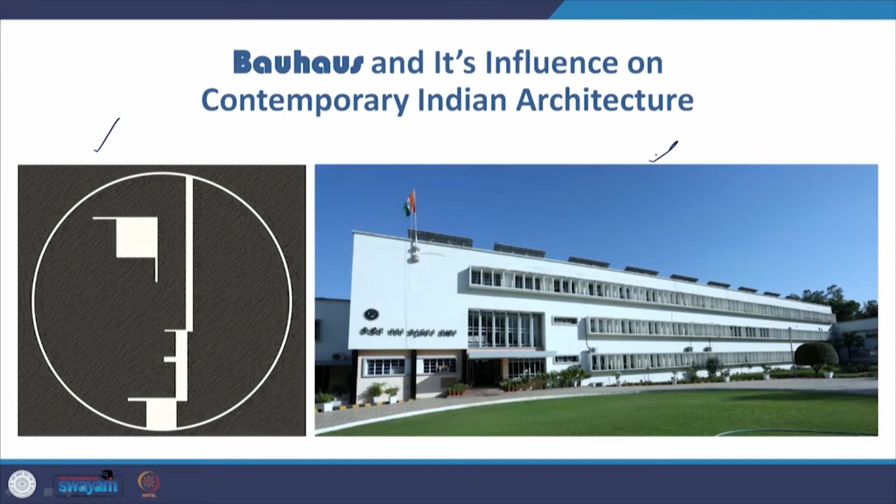Hello students, we will continue our presentation on the work or the impact of Western architects in India, and we are looking at the contribution of Walter Gropius. This is part 2: Bauhaus and its influence on contemporary Indian architecture. This is the logo of Bauhaus, and this is the Central Building Research Institute, CBRI, IIT Roorkee, designed by A.P. Kanvinde.

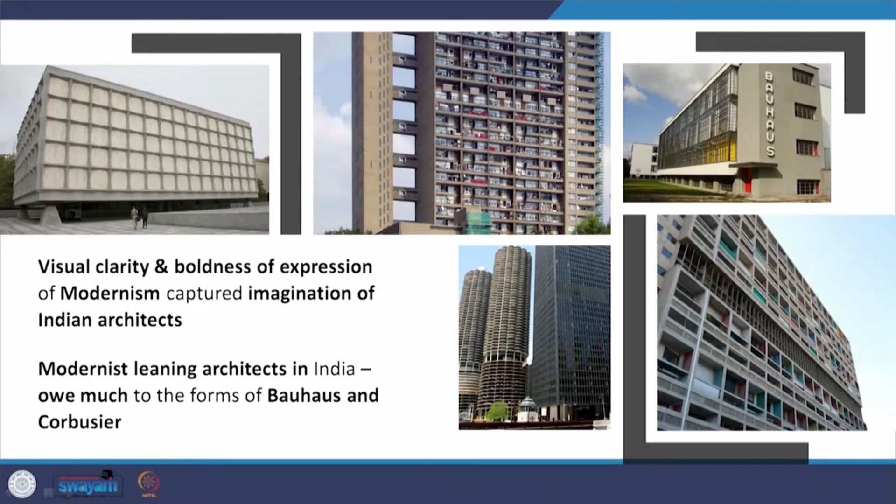Now the contribution of Bauhaus has been in two parts: architecture and education. The education you are receiving as students of architecture is predominantly based on the Bauhaus model. The visual clarity and boldness of expression of modernism captured the imagination of Indian architects. In the last presentation on Walter Gropius, I talked about the design of the Bauhaus school by Walter Gropius and the curricular structure of the Bauhaus school, which then got global presence.

But like I mentioned last time, we cannot look at the design of Bauhaus as an isolated example of modernism. There is a range of architects and their buildings that form the composite picture of modernism: Corbusier, Mies van der Rohe, Walter Gropius, the De Stijl architects like Rietveld, and Adolf Loos, and then later many architects like Richard Neutra, Marcel Breuer, Alvar Aalto, Eero Saarinen, and many others, continuing onwards into late modernism and so on. So the picture that emerges is not one architect but several architects contributing.

This presentation focuses on the contribution of Walter Gropius and Bauhaus. The modernist leaning architects in India owe much to the forms of Bauhaus and Corbusier, primarily because Corbusier came to work in India, when he designed Chandigarh and several projects in Ahmedabad, while Walter Gropius made his presence felt through the works of two prominent architects, Habib Rahman and A.P. Kanvinde, the first generation of modernist architects in India.

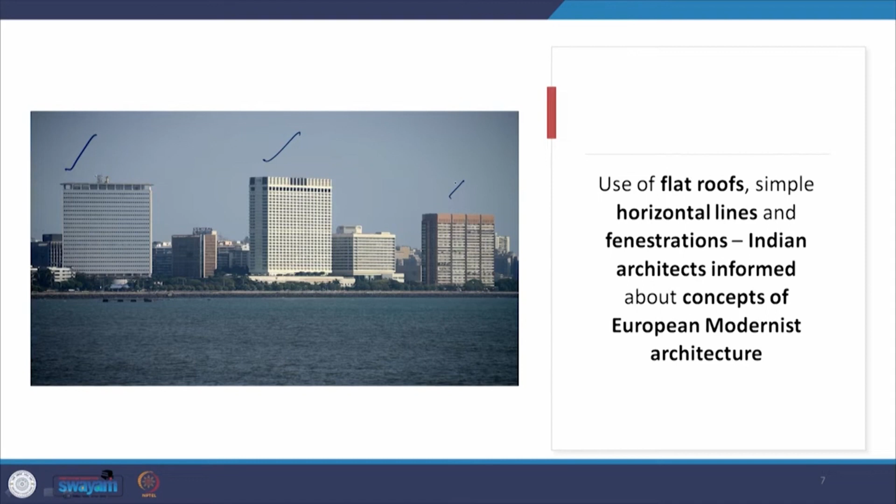For example, these buildings: this is the Air India building in Mumbai, the earlier Air India building. This is the Trident Hotel of the Oberoi chain, and I believe this is a residential building. So these buildings along the Marine Drive, where we see the use of flat roofs and simple horizontal lines and fenestrations, show clearly that Indian architects were informed about the concepts evolving in European modernist architecture.

Of course, these buildings were adapted for Indian situations, and as I have said earlier, climate is one of the defining factors of the way our buildings look. Modernist buildings in India were being built parallel to modernist buildings in Europe and America, particularly skyscrapers in America. For example, when I am talking of point blocks, they were sleek glass skyscrapers there. The same architects who were working there, for example, in the buildings they designed in India, would adapt them to our climatic conditions.

Gropius's link with India was through AP Kanvinde and Habib Rahman, and that was because Habib Rahman studied under Gropius at MIT, while Kanvinde studied under him at Harvard. How can one man be in two places?

Gropius was teaching at Harvard and also taking lectures at MIT, so both of them got an opportunity to study under him. They brought Bauhaus into India, and in fact surpassed Corbusier in bringing modernism into mainstream Indian architecture of the period, with which their projects are related.

Looking back at the middle class works of Architects United in Pune, for example, those works are connected with modernism in general, and in some ways also with Corbusier, because it is difficult to differentiate where one modernist architect's contribution ends and another begins. But there is a very strong impact of the functional organization of Bauhaus and Walter Gropius, so mainstream Indian architecture probably owes more to Gropius than to Corbusier. But it is very difficult to define these fine lines. Their works changed the course of India's architectural pattern of that time.

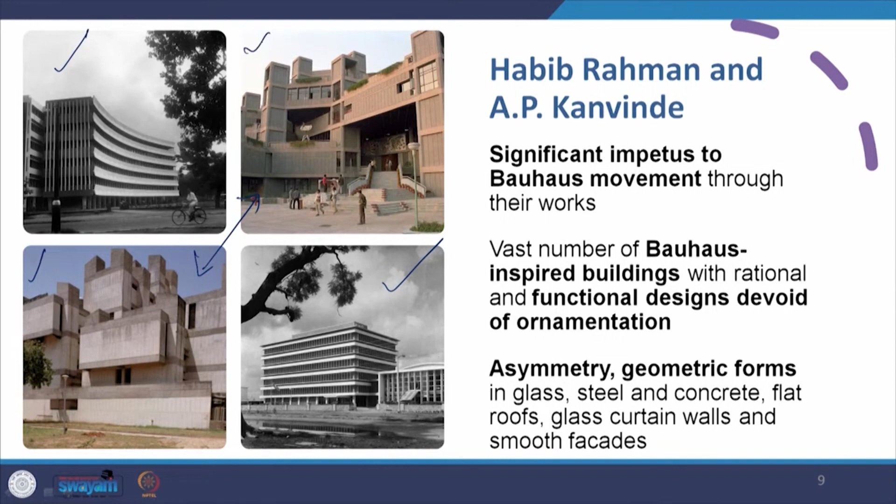This is the Dak Tar Bhavan by Habib Rahman, and the amazing contribution he makes in bringing this kind of modernist building to India is seen in sharper relief when we realize he was working within the structured mechanism of CPWD.

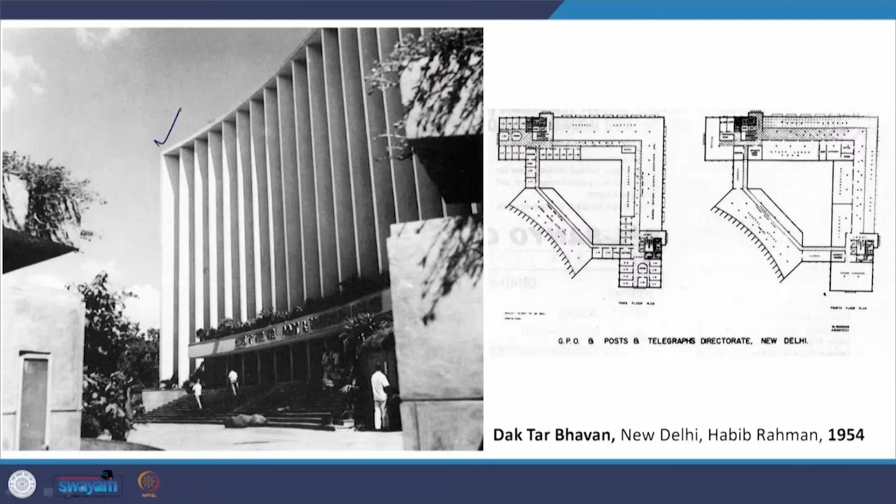He was heading the CPWD, never moving out of it, and while working for them he designed these amazingly iconic buildings. The Dak Tar Bhavan is very strongly connected with modernism, with fantastic louvers or sunbreakers, which is the impact of Indian climatic conditions.

Then we have a series of buildings in the 60s: the Indraprastha Bhavan in Delhi in 1965, multi-storied apartments in R.K. Puram in 1965, the Curzon Road Hostel near Connaught Place in 1967, and the WHO building in 1963. These are the 60s contributions of Habib Rahman.

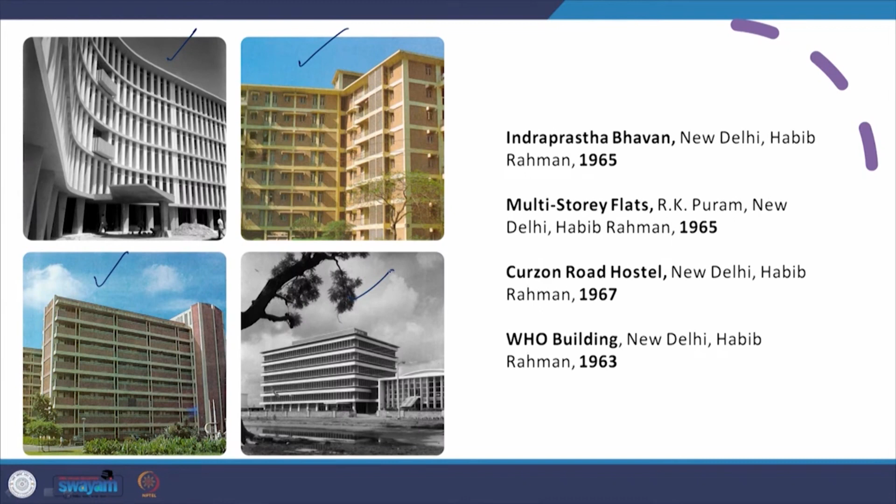Having stepped off the boat from America, he designs these buildings so strongly connected with Bauhaus and Walter Gropius. Then we have the contributions of Kanvinde, which are probably somewhat earlier. The reason these buildings appear in the 60s in Delhi is because before this,

Habib Rahman was working with the Calcutta Public Works Department, where he designed a very important building that set off his journey, the Secretariat building. We will look at that.

Kanvinde began as the consulting architect with the CSIR, designing the CSIR labs: the National Botanical Research Institute in Lucknow in 1953-54, the Toxicology Research Center again in Lucknow in 1969-70, the CBRI in Roorkee in 1951, and the Physical Research Laboratory in Ahmedabad in 1953-54.

Bauhaus was integrated as time went on with India's cultural and climatic factors. Things could never move forward in India purely as modernism. What I mean is that these buildings did come in as purely modernist works in the hands of Rahman and Kanvinde, but the language of culture and climate of India was added on to it.

This happened in the works of Habib Rahman to a very large extent. In contrast, it did not happen in the works of AP Kanvinde, who stands out as one architect whose buildings had very limited connection with any traditional Indian elements, in fact to a large degree none at all.

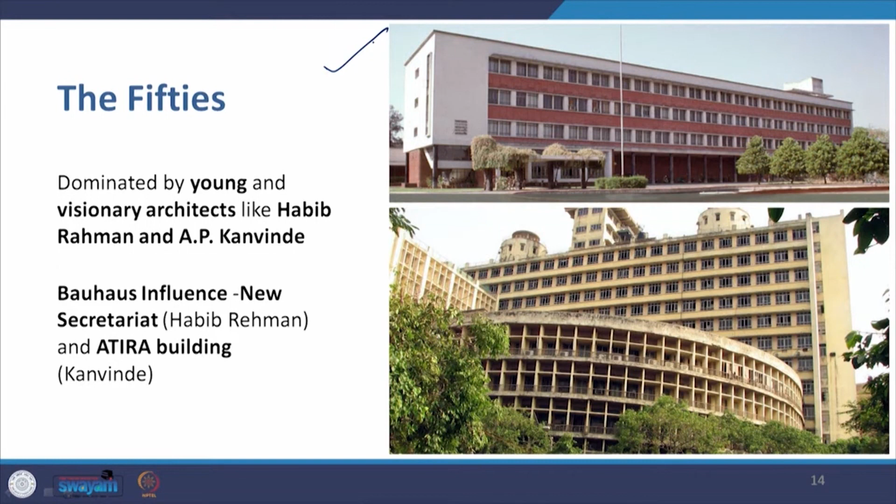Now in the 50s, they were dominated by these two visionary architects, Habib Rahman and Kanvinde, and the Bauhaus influence, for example, is seen in the Atira building, the Ahmedabad Textile Industries Research Association building designed by Kanvinde, and the Secretariat building designed by Rahman in Kolkata.

The new Secretariat building in Kolkata by Habib Rahman, 1949 to 54, shows the significant new way of thinking in rationalism. Rahman, having returned to India, said that he was full of Gropius, Oscar Niemeyer and Brazil. He said that in 1988, and in this 15-story modernist building he designed, there is a great clarity of form coming from Bauhaus, combination of geometric forms with vertical and horizontal lines.

You can see the vertical mass, accentuated by these vertical lines of the louvers on this side. This is the facade where you see these vertical louvers, and this verticality is accentuated by a series of vertical lines here. Then you have this part of the building where you have these deep louvers or sunbreakers or brise soleil like that of Corbusier. So this part of the work refers back to Corbusier.

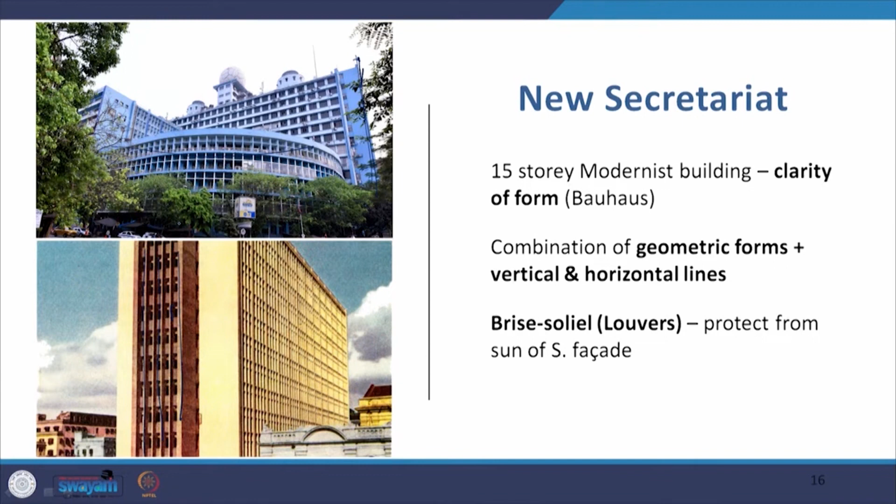Now these brise soleil protect from the sun of the south facade. So therefore the Indian climate, the presence of the Indian climate is felt immediately as soon as they start designing these buildings in India.

Now the UGC building in Delhi, the University Grants Commission building in 1954, the building on the right that you see here is the Comptroller and Auditor General building designed in 1958. So this set of two amazing buildings in the modernist Bauhaus category.

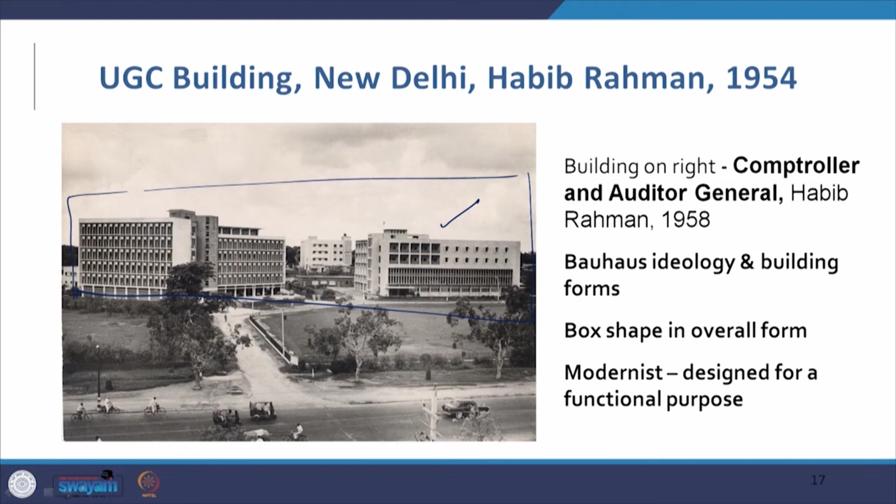So the Bauhaus ideology and building form is a box shape in the overall form, and it is designed in a functionalist manner.

Now with regard to the site function and climatic response, the entire building, the UGC building, is divided up into two wings to fit into the site, and it has covered parking.

The parking is provided by raising the building on pilotis, and the functional part that we see here is the service core, which is at the junction of these two wings of the UGC building.

Then there are the sunshades and louvers provided. So this is the Indian climatic addition to the modernist building, which eliminates direct sunlight from the rooms and protects the wall from the summer sun and reduces AC or air conditioning load.

So these ideas about thermal comfort, energy efficiency, were already embedded in the modernist buildings in India at a time when they were not being talked about with such urgency as we are talking about it today.

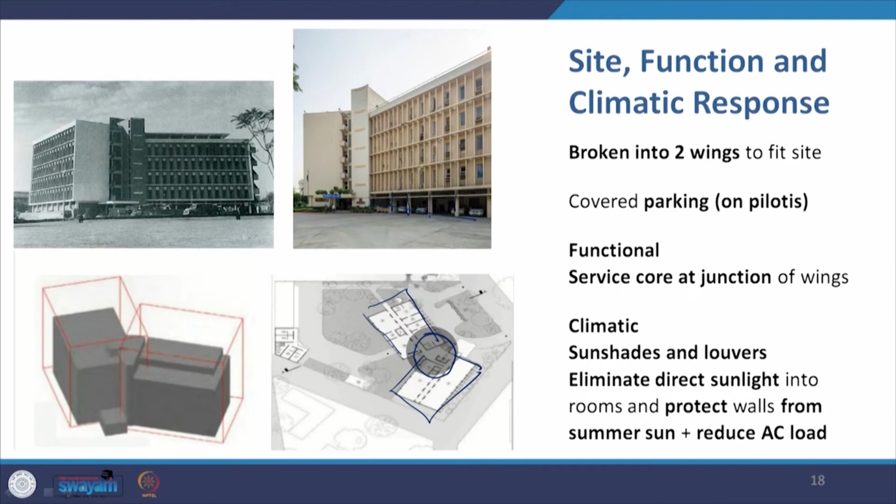All the functional parts are distinct from each other, but they are integrated together to work together, as I mentioned last time, like the organs of the human body, or like you see in a printed circuit or a circuit board in which all the chips are connected to work together.

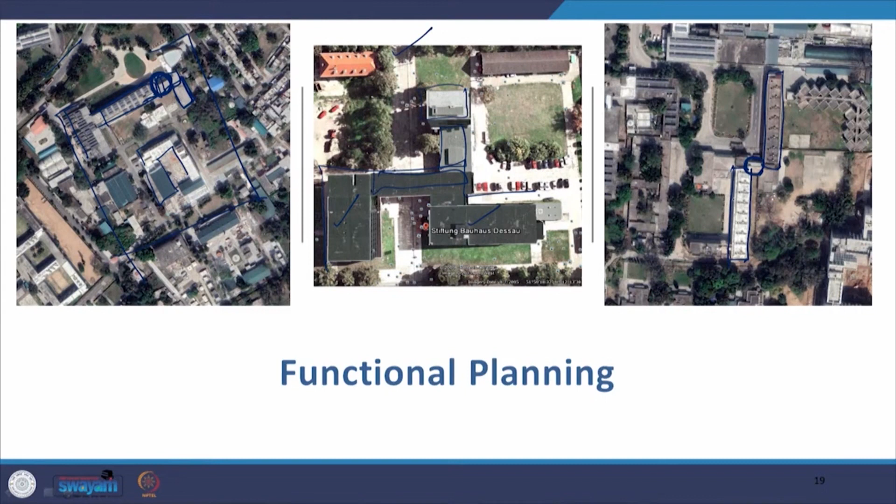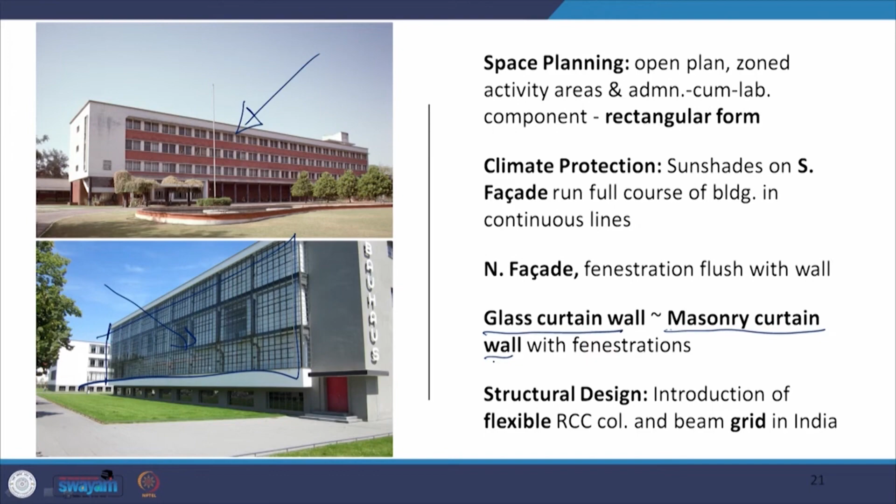The structural design shows the introduction of the flexible RCC column and beam grid in India through projects like the Atira building. Kanvinde's architectural, structure and construction ideas were highly influential in India simply because their logic and utility was easy to understand and follow. Kanvinde's work of the time held up very well, both as an intellectual exercise and as a physical exercise in functional planning of the building, whether it is the PRL. Now this is the PRL, all three of these are views of the Physical Research Laboratory in Ahmedabad.

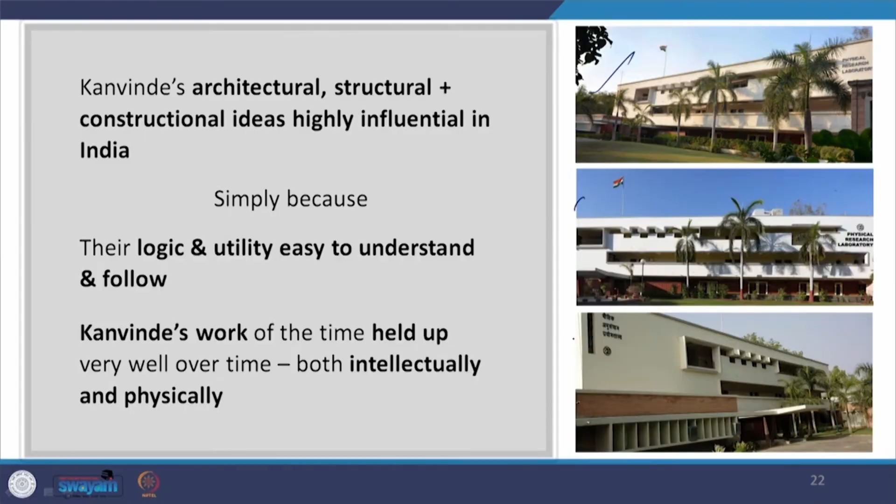But let us come to a building which is the only example I have found where there is some kind of connection with a traditional Indian element, and that is the Azad Bhavan in New Delhi, from 58 to 61. In this building, the client's desire was to Indianize the work, and therefore what is said by critics is that this turned out to be a superficial treatment which is not very well integrated, and it is not a much remembered work of Kanvinde.

Now what is the traditional feature? This dome that you see at the entrance, this jali work, and then you find this dome, in a kind of hierarchical fashion. A similar domical structure is used as sunshades over the windows, and then you have this cantilever at the entrance of the building.

So this element is the Indianization of the building. Had Kanvinde done it as he did the Atira building or the PRL, this element wouldn't have been there as sunshades over the windows, and the building would have been a straight up example of Bauhaus.

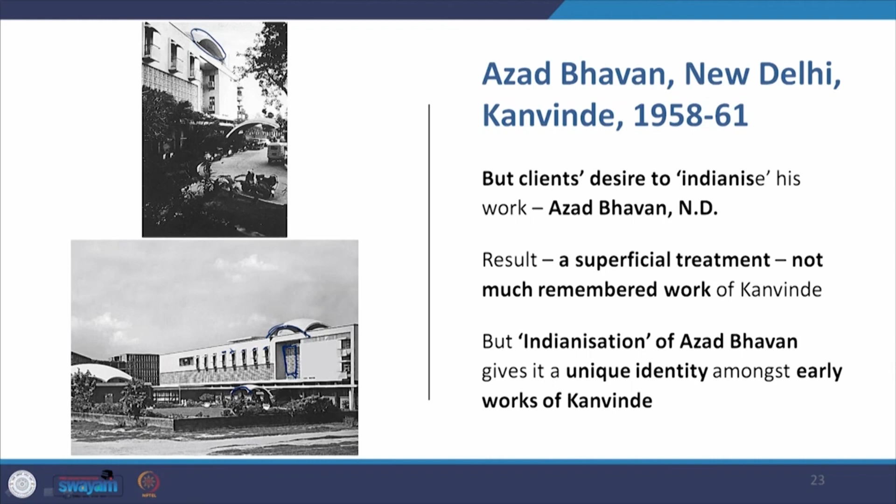But Indianization of Azad Bhavan to me does give it a unique identity amongst the early works of Kanvinde. In fact, to be very honest, I have appreciated the Azad Bhavan the most amongst the early works of Kanvinde, at least in form and appearance. But that is my personal opinion — you must form your own opinions with regard to these works.

But here is an interesting exercise. This is the Azad Bhavan, and you can see very clearly the connection between the dome, the sunshades, and the entrance cantilever.

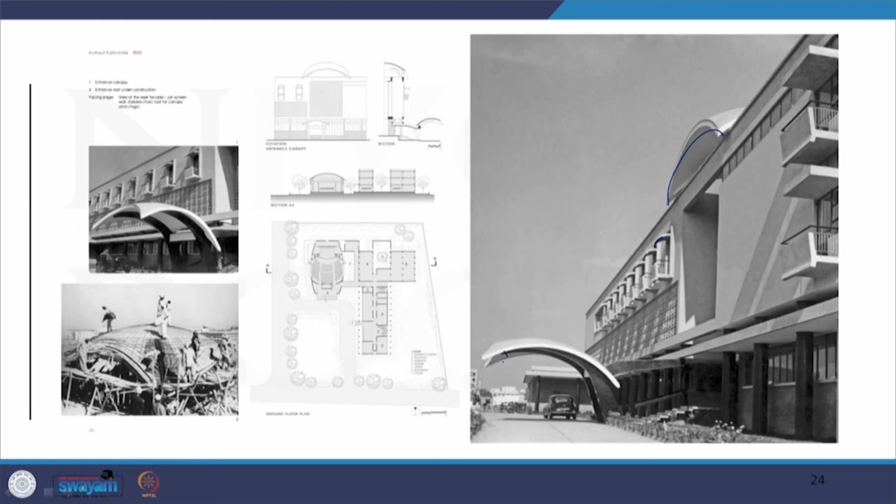Now watch carefully. I am comparing it to several buildings on our campus designed by Mr. Kanvinde, starting with the Civil Engineering Department. Look at this building carefully, and you will find the same cantilever as in the Azad Bhavan. Now look at another building just behind the Civil Engineering Department, the Mechanical Department — it also has this kind of cantilevered entrance. So the cantilever entrance turns out to be the dominant form element at the entrance of these buildings.

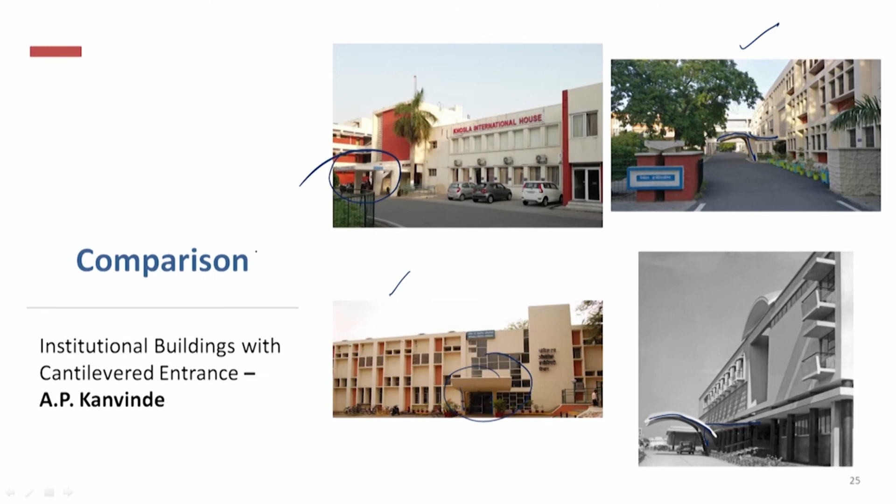We again find this kind of cantilevered entrance in Khosla International House, designed by Kanvinde. There are other buildings on the campus not designed by him that follow a similar format. For example, the Chemical Engineering Department also has this kind of cantilevered entrance. This became a repetitive model, and we find it in these buildings.

Let us come to a different example by a different set of architects. This is the Oberoi Hotel in New Delhi by Durga Bajpai and Piloo Mody in 1958.

John Lang says the Oberoi Hotel represents the international style propagated by Walter Gropius. But when I look at this building, I am also reminded of the form of Unité d'Habitation, and in fact even the roofscape, the roof garden of Unité d'Habitation, finds its resonance in the Oberoi Hotel, where you have these facilities right at the top of the hotel. Then there is the block form of the Bauhaus, which is also evident in the Oberoi Hotel. So this building is a reminder not only of the international style of Walter Gropius, but also of the modernist brutalism or international style of Le Corbusier.

But this is so different from Ashok Hotel that came up 3 years earlier. I told you this was designed by E.B. Doctor with a modernist facade, but covered with traditional Indian elements like the jharoka, the chhatri, the jali, the brackets. The Oberoi Hotel, on the other hand, is devoid of these traditional Indian elements. It is upfront a modernist clean-cut example.

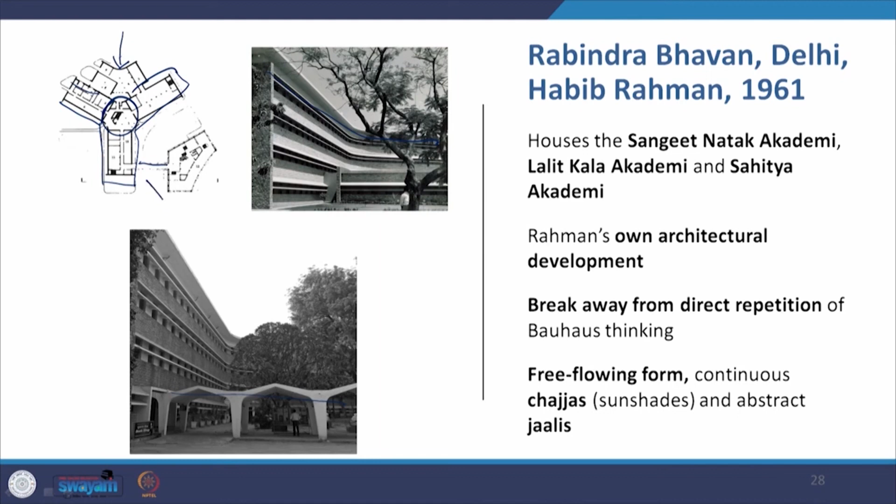This has 3 wings connected by one common area from where these 3 wings move outwards—a free-flowing form with a continuous chhajja or sunshade, and abstract jalis. When you look at this facade with the continuous sunshades, you are looking at the building from this side, and when you look at this facade with this corridor, you are looking at the building from this other side.

Another building, one of the important works of Alvar Aalto, was the Paimio Sanatorium in Finland, which came up in 1932. It is a clear example of international style, but the important point is this: there is a Bauhausian concept in the functional organization of Paimio Sanatorium that is also reflected in Rabindra Bhavan. Here, every segment, every part of the building corresponds to a different function, just as in Bauhaus, and just as in the Rabindra Bhavan and the Lalit Kala Academy.

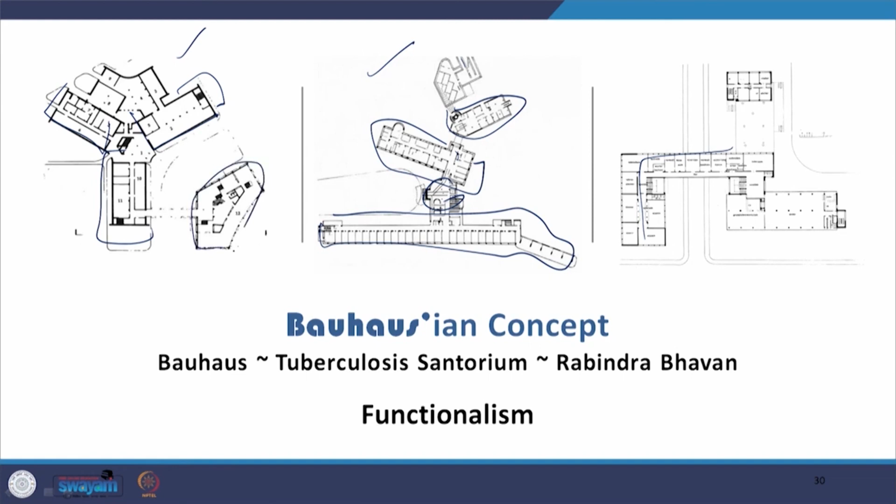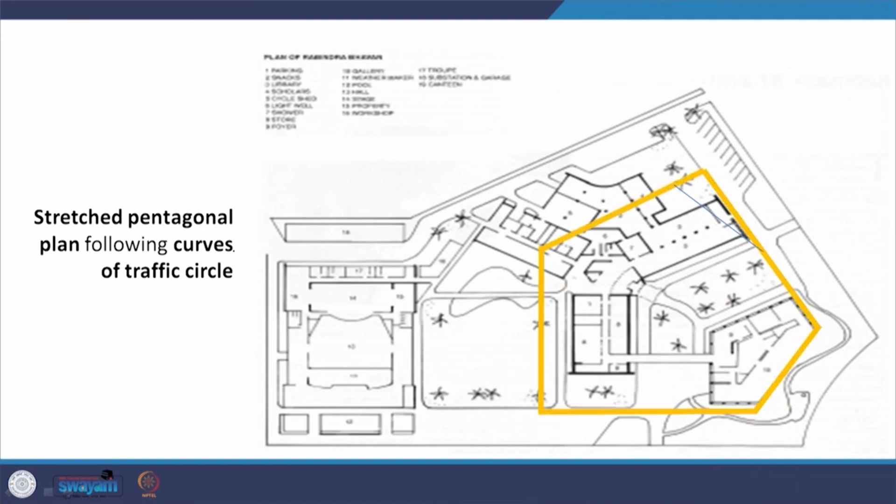These 3 wings form different parts of the Rabindra Bhavan, and this is the Lalit Kala Academy. The overall form of the Rabindra Bhavan is a stretched pentagonal plan following the curves of the traffic circle, running parallel to the road network, with a larger pentagon being formed on the outer periphery.

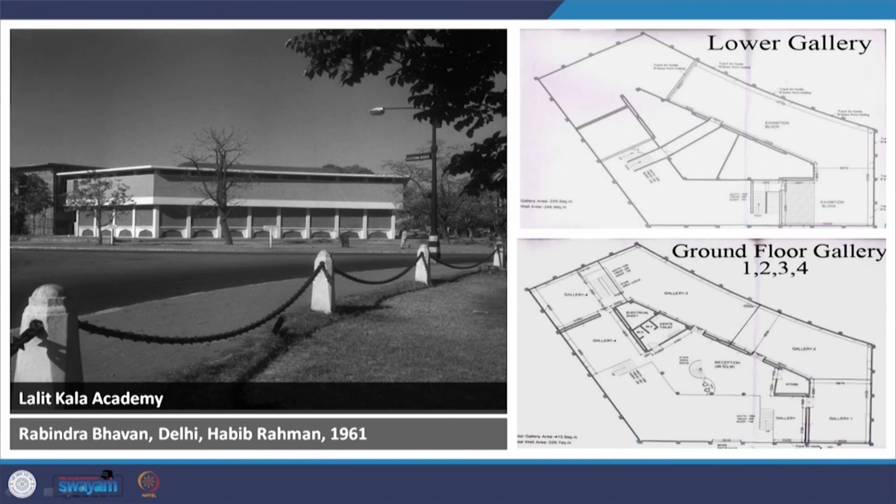The Lalit Kala Academy design is itself a pentagon. So what we have here is an inner pentagon, another inner pentagon within it, and then the larger pentagon on the periphery.

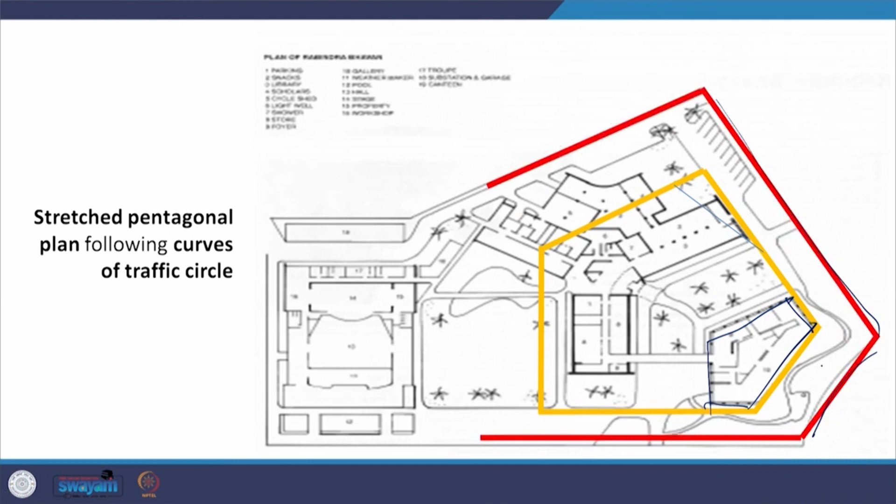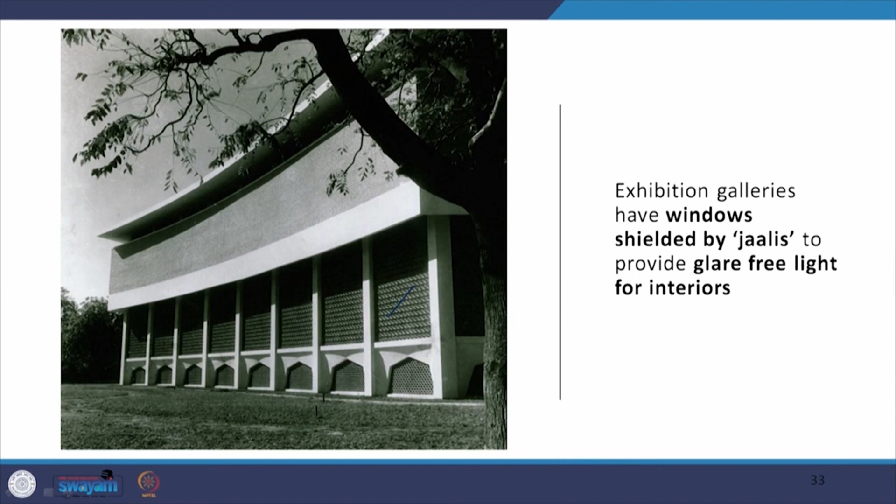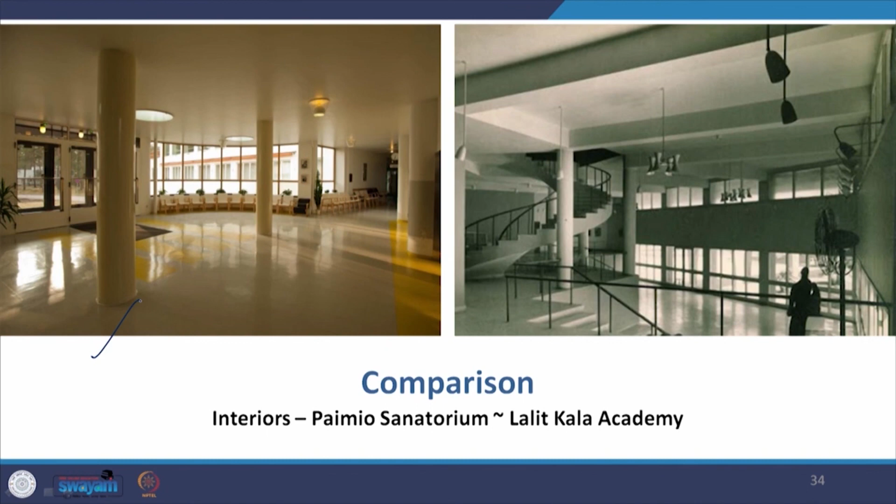I will end here. This shows, in summary, the relationship and contribution of Walter Gropius and Bauhaus to the growth of modern Indian architecture, particularly through the works of Habib Rahman and A.P. Kanvinde. Starting from next session, we will look at the work of Louis Kahn and his contribution to modern Indian architecture. Thank you.